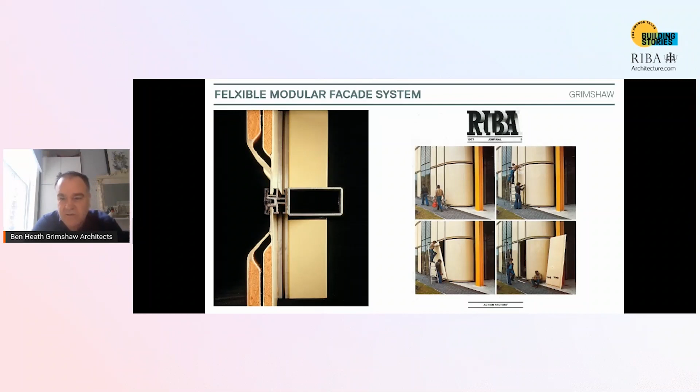And the image here is a photo from the cover of the RIBA Journal in 1977, illustrating that even wearing extreme flared jean trousers, you could change out these panels in under 10 minutes. And here's Nick inspecting these GRC or GRP panels on site.

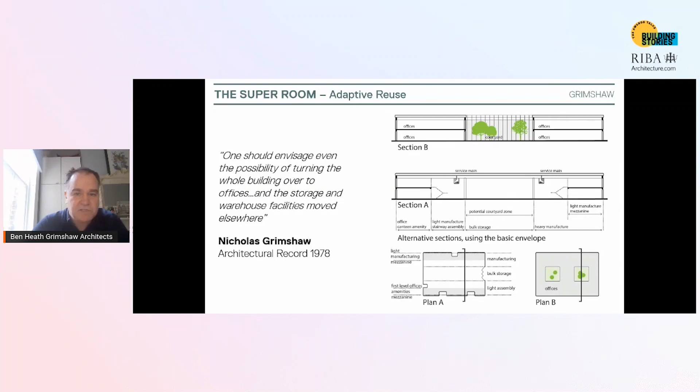And another key feature, longer term, the building was imagined as what Nick called a super room. And this is an illustration from the Architectural Record article from 1978, showing remarkable foresight from Nick, where he talked about, in the future, it may be a factory now, but in the future, it might even adapt into an entirely new use from which it was originally conceived. And these sketches are the sketches that he produced for the article, showing that, maybe introduce some courtyards and it could be an office building.

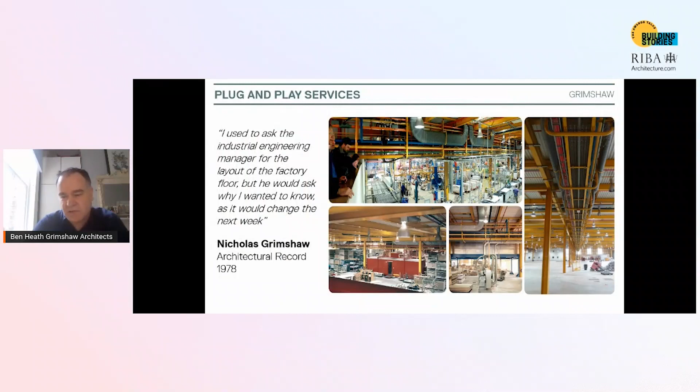So some of the other key features of the original building, this democratic factory, this idea of a focus on access to external environments, views, daylight, the idea that just because it's a factory, it doesn't mean that it shouldn't consider the well-being and health of people and create quality environments. Similarly, plug and play coded services supported the ever-changing manufacturing. So this adaptability and flexibility is at the heart of everything about it.

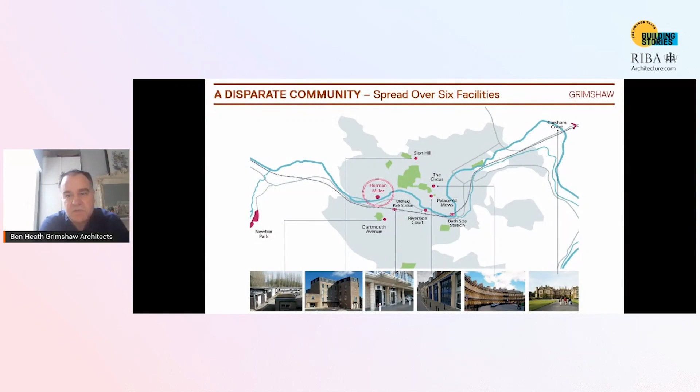And then over 40 years later, and actually following the listing of the Herman Miller factory, we were appointed by Bath Spa University to look at adapting the factory to accommodate their schools of art and design. And like many academic institutions, they'd grown organically over time, and the school was spread out over 6 different facilities throughout Bath. So this represented a brilliant opportunity to bring them all under one roof and engender a spirit of interdisciplinary collaboration and innovation, bring all these people together.

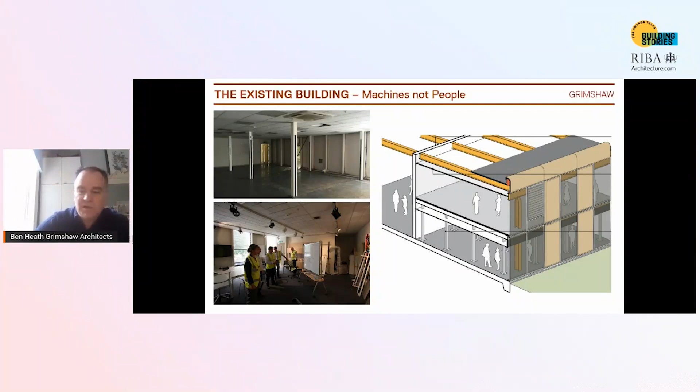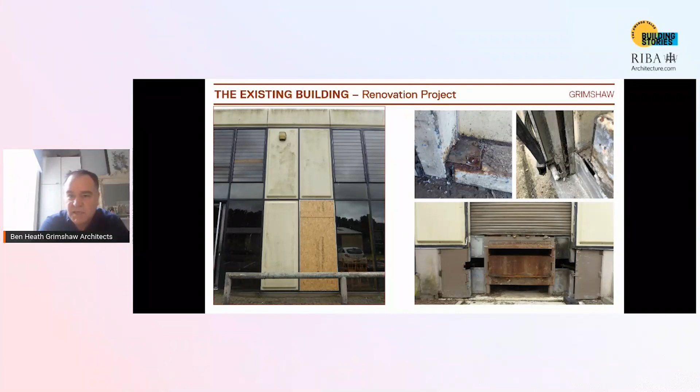Also, following a period of inoccupation and actually a bit of neglect, the building did represent a significant heritage and renovation project. However, as illustrated, this is a photo from shortly after the university bought the building. They had this pop-up exhibition in the space, and it just demonstrates that actually the bones and the DNA of the building really remained intact.

So what I'm going to talk through now are just a series of the key design moves we made, because I think when you're working with an existing building, but also a building which has just great integrity, it's about identifying the right key moves and building on the principles and values of the existing building, existing structure. So I'll just go through some of the key moves that we made, which were very much in support of the original building ethos and principles. So the first one is called repairing the super room.

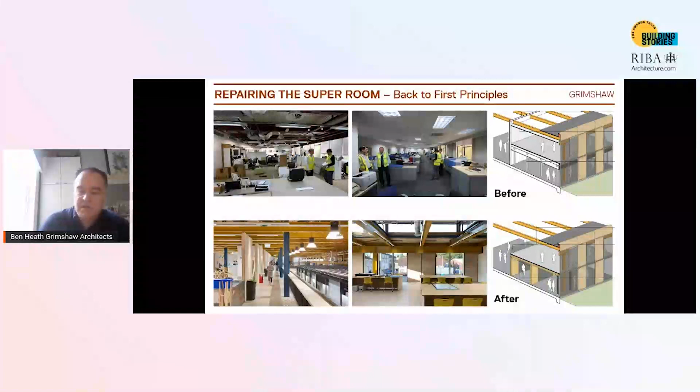So as I said before, the people had been siloed away in these little boxes, as shown in the illustrations below. The first move was to introduce open mezzanine decks, opening the space back up into the heart of the building and putting people at the heart of the building again. So, visually connecting the spaces and the people back together, connecting those people and spaces back to nature outside, and just flooding those spaces with light and creating visually uplifting environments for people to learn and work in.

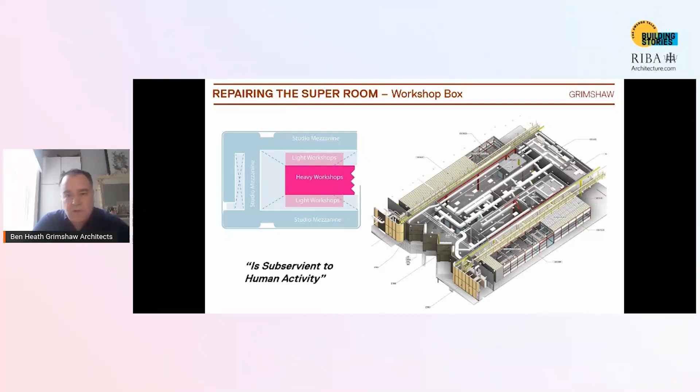The other key aspect of repairing the super room, because often the secret to flexible spaces is actually identifying and accepting what is inflexible. And so in support of an open, connected, completely adaptable super room, what we did was the heavy workshops, so things like metalwork, casting, woodwork, were located centrally in what we called the heavy workshop box, and then lining either side of these and animating the surrounding spaces are the light workshops, so things more like printing, photography,

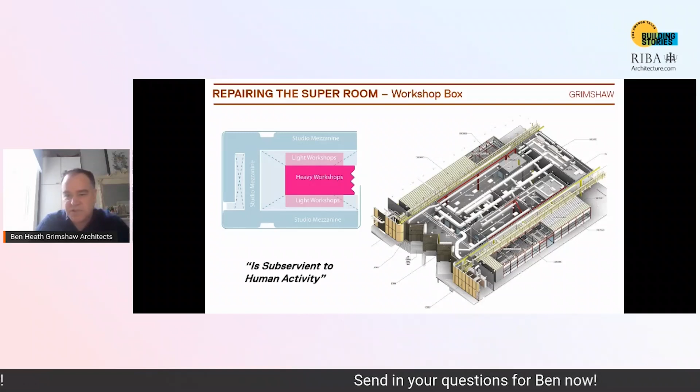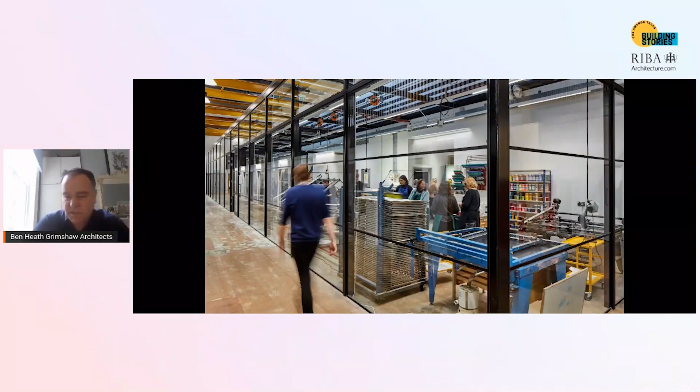paint, digital. And this was very much at the heart of the university's ethos, the School of Art and Design's ethos, which is putting making on show, so learning by seeing and doing by making, which is something that the Dean constantly repeated to us. And again, even these workshop spaces are flexible workshops, so they're able to adapt to the specific workshop requirements, but also as course architecture changes, they can adapt and change. So even though it's the same spatial configuration, they can offer a number of different environments.

And then spatial planning. Again, we just made some really simple key moves. The first one is a new internal street. So on the left there, a new internal street connects the city side to the north to the River Avon to the south. So, really lovely two front doors, a riverfront door and an urban front door. And then on the right, a simple wrap of first floor studio space above, and then publicly accessed via the retained existing visitor entrance to the west. That's on the left of the street, and that promotes public access and collaboration.

And then the building to the right, to the east, is serviced from the existing loading bay. So the area to the east of the street is more private, accommodating workshops and private studios, and to the west is more open and collaborative. So the street, as well as making its connections, defines the nature and interstitial space of the building. So that's a view of that internal street. We're looking towards the river entrance, connecting people and connecting place, and promoting learning and collaboration through visual connections throughout the building.

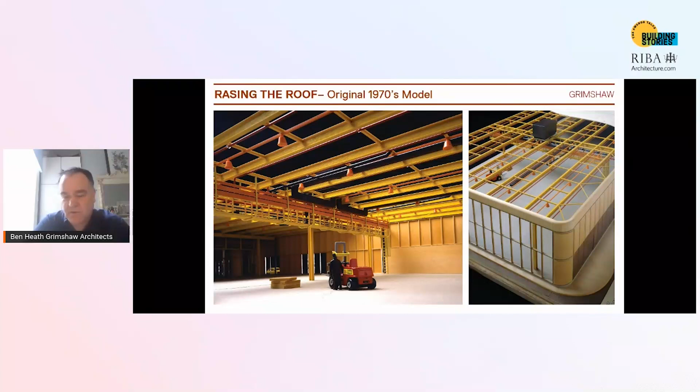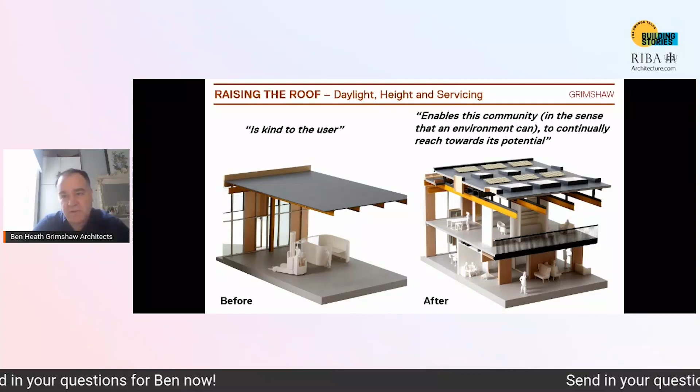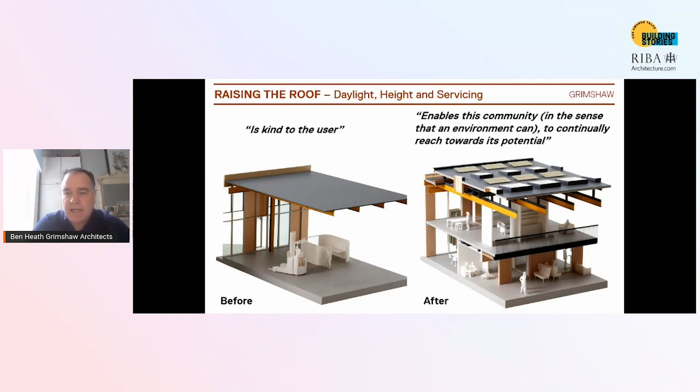So we introduced a new mass timber or CLT roof, which is lifted on these 1.5 meter high structural Vierendeels, and this allowed for additional structural capacity for high performing rooftop PVs, but also a service zone located above those heritage beams, and critically an additional 1.5 meters of space at mezzanine level to support studio space, and then a continuous clerestory and north roof lights, ensuring natural daylight throughout the building. So yeah, flooded with light, efficient, flexible, and spatially generous.

We had some height considerations, so we couldn't actually have sawtooth north lights. So we used an interlayer, which blocks out everything but north light. So again, throughout the building, which was important in the School of Art, or one that accommodates art, north light evenly distributed throughout. Another one was plug and play, flexible systems.

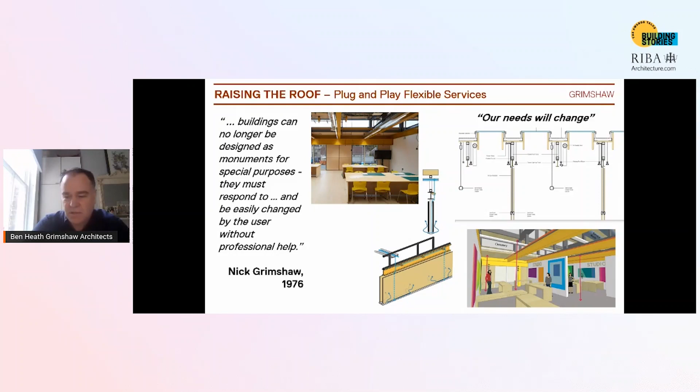So following the same principles as the original factory building, a plug and play high-level service route runs throughout the building, allowing for data and power to be introduced throughout the mezzanine studios in line with any changes of use or accommodation. And what we did is we used this really useful 1.2 meter grid of the heritage structure as a framework for a flexible fit out within the mezzanine space, with the studio space being completely tunable to specific needs and future requirements.

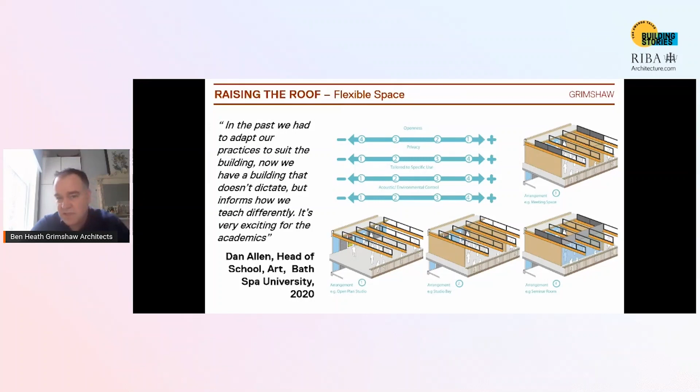So anything from the left where it's completely open plan to the extreme where it's actually a fully enclosed unit. And actually what happens for the art studios, the students build their studio space in line with these grids at the start of the year. So yeah, lightweight, low carbon, high performing new roof, but retaining that heritage building aesthetic, clearly articulated throughout.

So upgrading the facade. On the left is the original facade as we found it, which was a single glazed, non-toughened piece of glass and a very lightly insulated GRP panel. But what was critical, obviously, to the building is its flexibility. So the existing facade was upgraded, replacing the non-toughened single glazed panels with bespoke double glazed units and renovating the GRP panels. But critically the same flexible and adaptable modular system was retained.

But through the increased insulation, double glazed units, etc., the total environmental performance of all aspects was improved by over 400%. And despite their age and a number of holes being drilled through them, 100% of the GRP panels were reused.

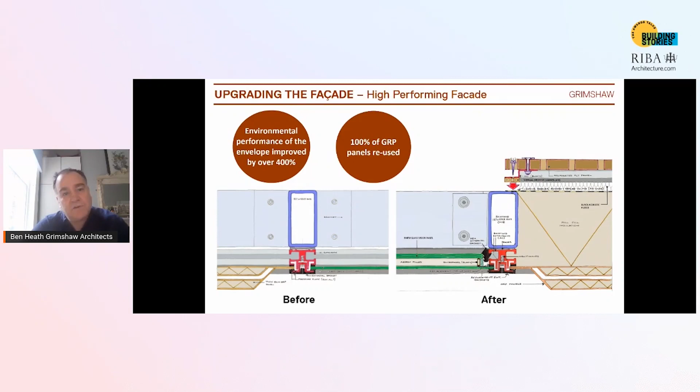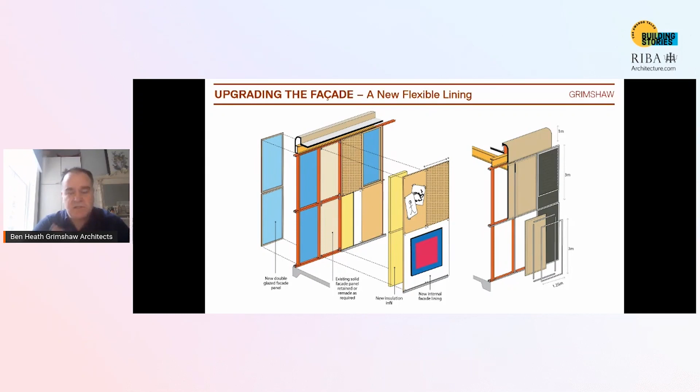So in addition, a new flexible modular panel system was introduced internally. We introduced the same idea of a flexible panel system internally that existed externally, through the process of insulating. So whether it's an office space or studio space, you can swap out the internal panel in the same way you can the facade. So there's the external modular system on the left, upgraded and refurbished, and the internal modular system on the right there. So a high performing facade system delivering the same aesthetic and adaptability as the original Herman Miller factory building.

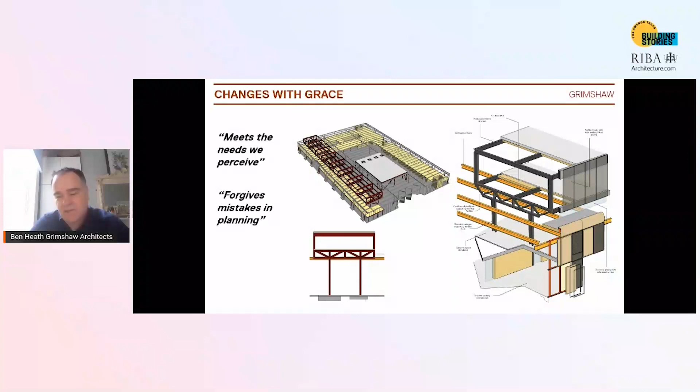So changes with grace. The original Herman Miller building had been specifically designed to adapt and change to future needs, but where the existing building was unable to meet those new user requirements, we introduced a more private, standalone rooftop pavilion. This was critical to the university's brief and success because it created a more private, flexible, different kind of space with these amazing views over Bath. But it was, again, slightly fortuitous in that it utilised existing foundations that had been put in place where some future new structure was actually imagined.

So doing more with less has become a bit of an imperative, both for universities and in responding to the climate crisis that we see ourselves in. So the embodied carbon within this building shouldn't be lost if at all possible. And on this project, we saved 1,420 tons of carbon. What's that? That's over 200 elephants. But I think what's really important about this project is that it illustrates this does not need to be at the cost of future flexibility or compromising environmental performance. So you can have your cake and eat it too.

Finally, I'm just going to touch on working with Bath Spa University, but also working with universities in general, because despite fairly modest budgets, I find that university projects tend to be incredibly rewarding and really rich projects. And I'll just explore from my experience on this one why I think that is.

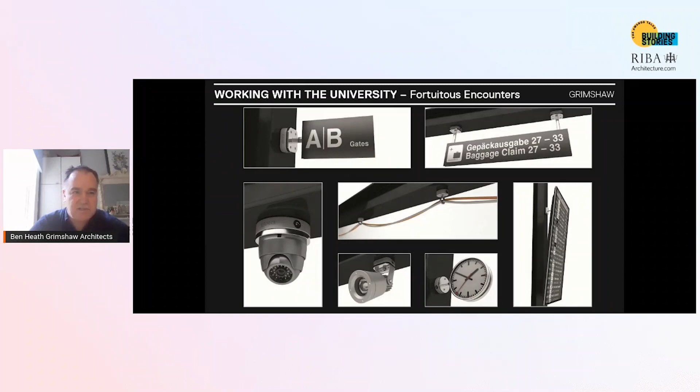And within that, you can adapt anything to do it, whether it's lighting, signage, clocks, whatever. Another key aspect of working with universities is, as well as being kind of experts, which is quite a delight, which means they also tend to respect you and the other consultants as being experts, which not all clients do. They're incredibly passionate people. So we obviously go through an in-depth briefing process with all aspects of the university: academia, but also technicians.

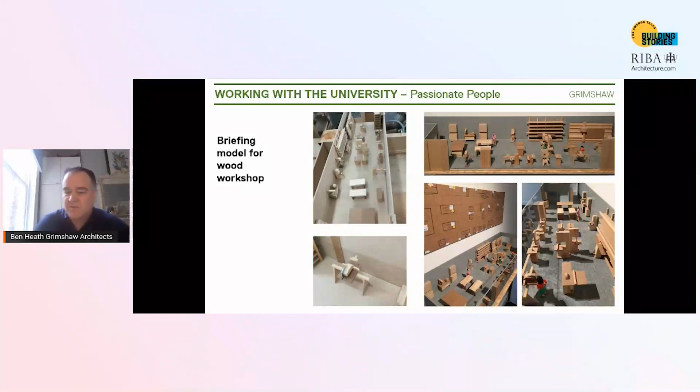And so we had our initial briefing workshop with the technician that runs the wood workshop, and we came back for the next one, and he'd obviously built this completely to-scale replica of the kind of discussion we'd had at the previous meeting, obviously all in wood, but it's that kind of level of passion that really helps bring great results. And then one aspect is also empowering students.

For the project, we worked with the undergraduates at the university, who actually developed this really lovely bespoke font and building signage system, which we ended up using throughout the building. There are other examples as well. We did some fabric acoustics with an artist who was an alumni of the university, and other graphic work as well. So again, it's really enriching both for the university, the students, but particularly for the designers, I think, to work with.

And then the final thing I'm just going to touch on is they're unique organisations in many ways, remarkable and frustrating in equal measures. We wanted to try and organise a time-lapse camera for the project, and we were told that, yeah, that sounds like a great idea, but we can't really afford it. But we pointed out, actually, they're 200 quid, surely we could afford it on this project. But no, the budget was stretched. They could only do what they could do.

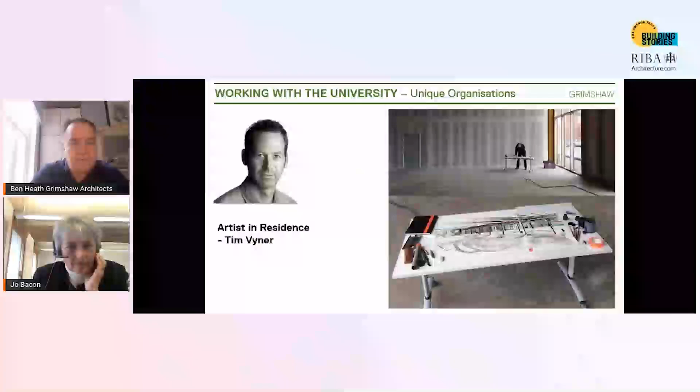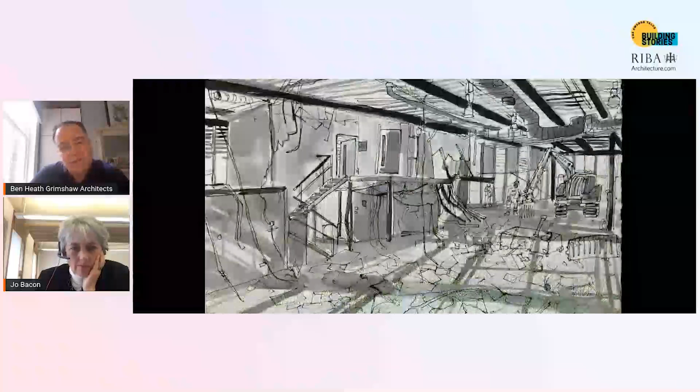But what they could do was provide an artist in residence. So Tim Vyner, who was an alumni of theirs, internationally recognised illustrator. So while we didn't have a time-lapse camera, what we did have was an artist in residence who recorded the whole process we went through, whether that's the site hoardings that he sketched, but also just recording and sketching and illustrating the whole design process. So there you go. And that's it from me.

Thank you. Ben, that's great. I've got a couple of quick questions. Can you talk a little bit more about the cladding? I mean, it was 1970s yacht technology. So the real question is, was this the most difficult aspect of the upgrade to current standards? We thought it would be, but actually it turned out not to be. Yeah, so it's exactly as you say.

GRP is more common in architecture now, but at the time Nick had to go to some Cornwall boat builders to actually get this stuff made, to the point where we couldn't quite understand why it was made like it was made, but we copied it just in case for some of the new panels we had to make. And there was a lot of worry around what they call fibreglass cancer or GRP cancer, but again, no delamination, amazing condition, and it turned out to be such a flexible material in that you can just patch it and repair it.

And actually what was really nice is we did all the repairs within the building itself, so it was like an organism healing itself. We learned a lot. The contractor was very nervous about it, in terms of committing to how many panels they'd need to replace, but actually in the end we salvaged them all. So we thought it'd be a lot more challenging than it was, and actually I think it just shows how flexible and diverse the material is.

And I've got one other quick question. One is vaguely how much of the original structure was kept in its entirety, but also, was there any hesitation from the Bath University team to invest in retrofit rather than a new project? If I'm honest, my worry is actually if it hadn't been listed, they might not have gone down this route.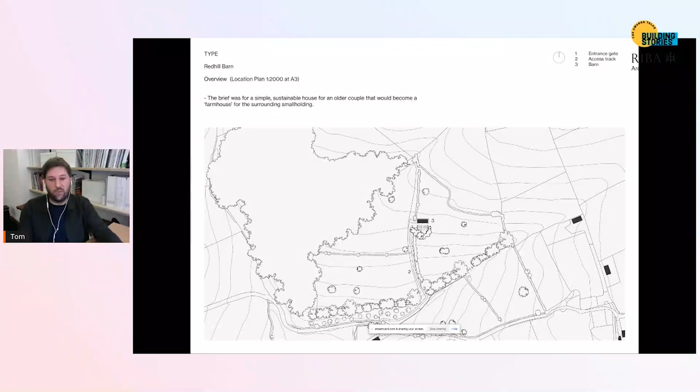And after years of searching, we found this site which has 23 acres of land, and it had a barn sat right in the middle of it, totally roofless, no planning permission, no access, no services. It was quite a crazy thing to undertake, but the decision was that this was going to be the site for this project. And there you see the barn on the right, sat in this parcel of land. In terms of their brief, we'd originally talked about finding a site and building them a much smaller house, but having found this building, it is the size it is.

So they had a very simple and modest brief for basically a 2-bedroom house with flexibility to have people to stay. That gave us the flexibility to work within this shell and to look more at the conservation of the overall building. But I think a big part of the brief for them was not to change or ruin the character of this thing, because having found this relic of an agricultural landscape, we all realised that the building was a very important and key part of the project.

Also, because it's a big building and it was more than we ever planned to take on, we had a very tight budget, and the location meant that a lot of our budget was going to go into services and access. So that set the whole project to be about being sparing and very thoughtful in what we could do. So this is the building as we found it, and it really was a stone shell, but the principal thing was that the walls and the elevations were intact. Originally this would have been a 2-floored building with a large threshing barn for grain on the upper floor, and then a cow byre on the ground floor for cattle.

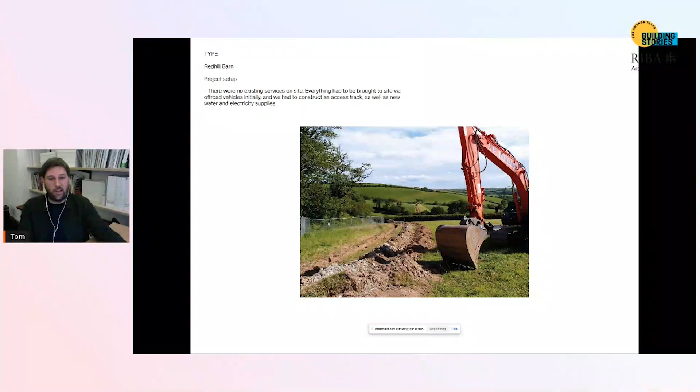One of the first things we had to do was put in the services, so you can just see how far we had to get electric and water. The trench went right down the valley and into the next fields. And this was our site hut that we built.

So the whole team came down with partners, and we stayed in a cottage for a weekend on a very blustery, wet and windy weekend in, I think, March, and built this site hut, which stayed up for the full duration of the project and was basically our base to cook, work, draw, detail. But having this office on site meant that the way we did the project was working with subcontractors, working with timber framers, masons, and every detail was talked through with the people that were going to do it. And we had a very interactive process of drawing and discussion.

But beyond that, Sarah, myself, and my father also were very hands-on, and every day we would also do work on site. So as well as designing and coordinating, we were also doing some of the physical work ourselves, usually slotting in where there wasn't an overlap with the different contractors.

So then this brings us on to the design and our approach to how we actually undertook the building. And the key thing about that was that we wanted to be absolutely clear about what was original and what was added. And that clarity of old and new was the dominant guiding principle from a landscape scale right down to the smallest details.

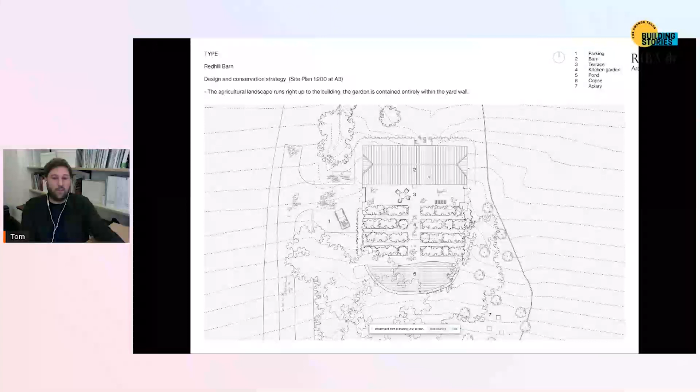The other key landscape move was about the curtilage and how we dealt with the garden and the domestic spaces. And we were absolutely adamant that the building shouldn't spread out into the landscape, and that the agricultural and wild landscape should run right up to the building as it always would have been. So the garden's contained to this semicircular fold yard that sits in front of the building, which once would have housed the livestock. And then at the rear of the building, the field really runs right up. There's no garden or paths or any domestication. It really feels like it is in the middle of the open countryside.

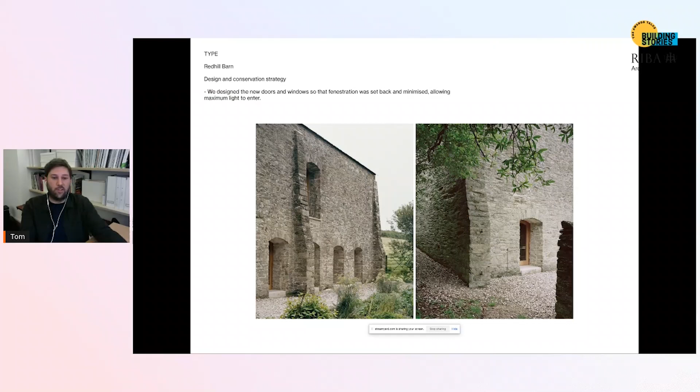And this drove the design of the glazing and fenestration. So we set everything right back and tucked the frames in behind the walls so that the amount of glass would be maximized and bring as much daylight from these openings we did have as possible.

And these doors on the ground floor were built for cattle to go in and out. So they're very wide. It's a windy site. And a conventional side hung door would be forever slamming in the wind and really cumbersome. So we came up with this idea of a pivot door, which would balance and feather in the wind and deal with this oversized opening without the additional fenestration of making a set of double doors or anything more complicated.

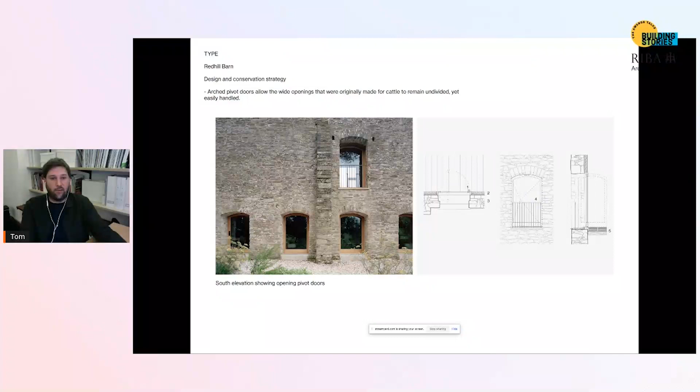So again, everything's designed to maximize the amount of light we can bring in. And that's how that door works on the inside, and there's a really nice balance to them. They translate this opening that was made for cattle into something that's very usable. And there you see the amount of glass we achieve by setting the frames back and tucking everything in. And actually, it's a very glazed building from the openings we have.

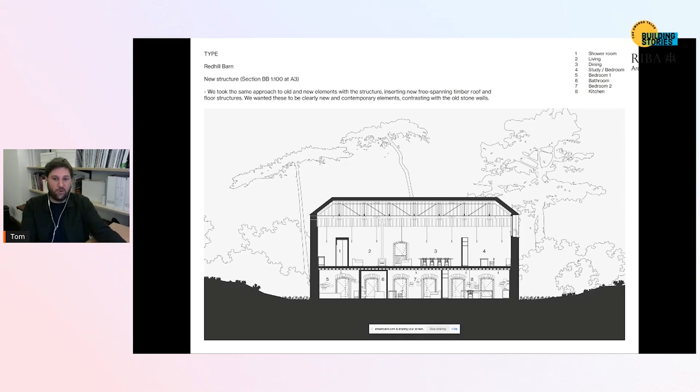So you've got a new timber roof truss structure and a new intermediate floor, which creates the principal spaces of the building. One thing we noticed when we started to draw through the building was that on the first floor, the height was enough to give us two floors if you ever wanted to.

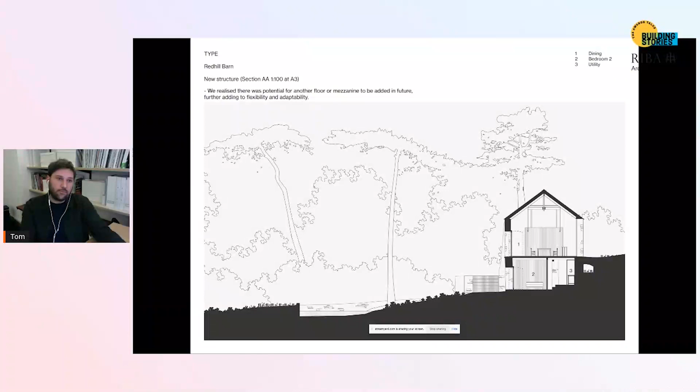And we were very aware that we're building a house for an elderly couple, and it's a big house. So we wanted to create something that was adaptable and hopefully would find future uses, perhaps as a family house. So we didn't want to constrain the space, and we realized that any traditional A-frame truss would bring a tie down quite low into that space, which would hinder that adaptability.

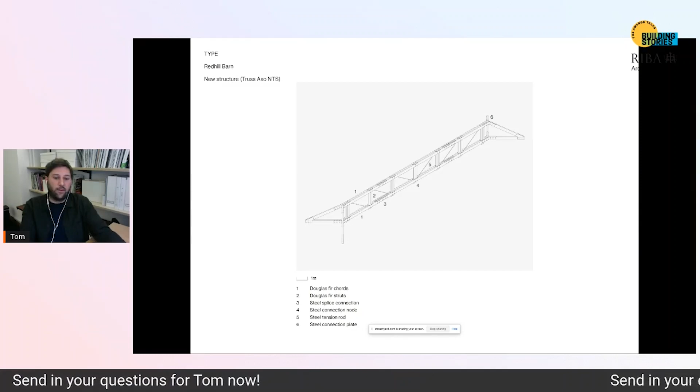And the solution we came up with the structural engineers was basically to span the space the wrong way, from gable to gable, with this truss structure. And that effectively is so efficient that it brings everything much higher up into the roof and allows for those two floors, but also gives a really impressive vaulted structure.

The truss was quite an ambitious thing to make. It's very simple, but it's this technology that's outside of typical framers' language. So they pre-assembled the entire thing in these sheds before dismantling it again and bringing it to be assembled on site.

And the result is what's hopefully a very contemporary structure, but hopefully echoes that pragmatic minimalist sensibility that old barns have, and why we love the structures, because they're doing the most and spanning large spaces in an elegant way with as little material as possible. So the language of doubled up members to use smaller diameter timber and using steel in tension where it's more efficient was guiding this to create this structure.

The other side of the structure was the first floor, which is a much simpler thing, just post and beam, but it sits on these stone columns, which we felt was an essential part of the building to conserve. So the columns needed to stay load bearing, but they didn't have any foundations. And the structural engineer was very keen that these things were built in with massive concrete feet to hold them in place.

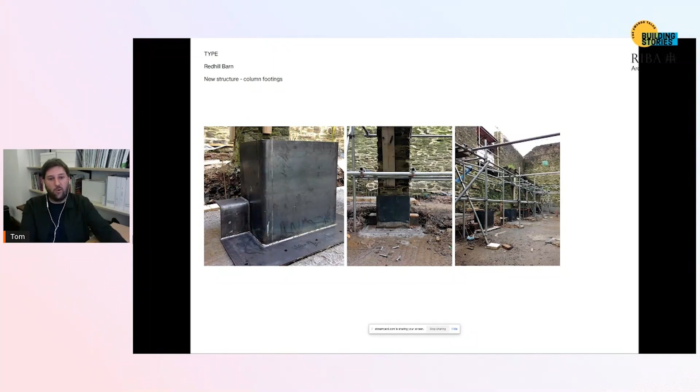So then to the layout and program. Again, it's about doing as little as possible with the budget, so creating as little division as possible just to give us our spaces. So we employed this device of boxes, which we inserted into the plan. So a box for a bathroom at the east end, and a box separating off the kitchen, which creates this kitchen larder storage, divides the ground floor into 3 spaces.

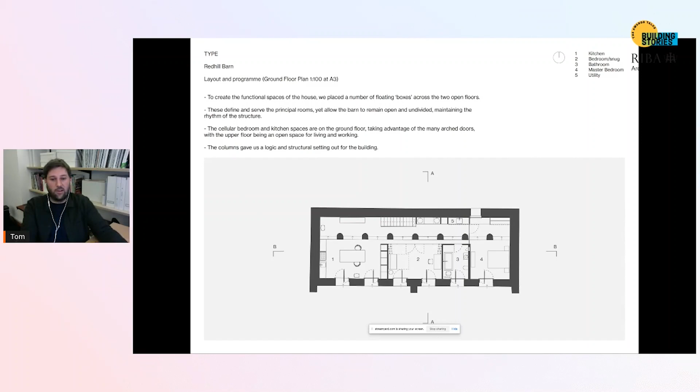The kitchen, the clients were adamant would stay on the ground floor because they wanted to have south-facing access to the kitchen garden, and then this flexible bedroom space in the center of the plan, and the principal bedroom at the east end.

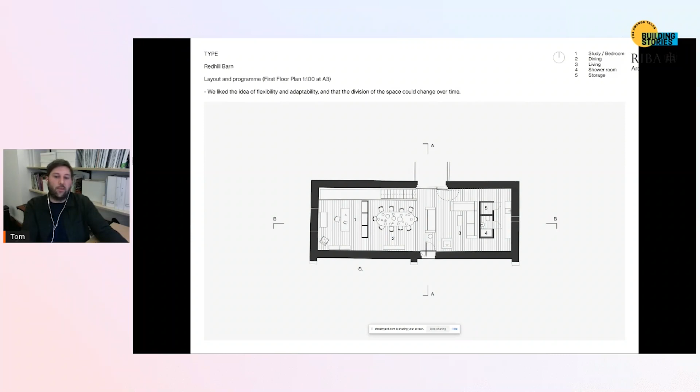And then on first floor, again, just using this device of 2 simple boxes placed in the plan, which bookends the central living space, a special event dining space, and then at the end on the west side, a study homeworking area, which becomes another sleeping space when we're there as family.

So this clarity of diagram of what's the old walls, what's the new structure, and then these boxes which divide space are carefully articulated in different materials, and it's a diagram that we stick to very religiously. So the walls are this white monolithic lime plaster, which helps the structure to breathe.

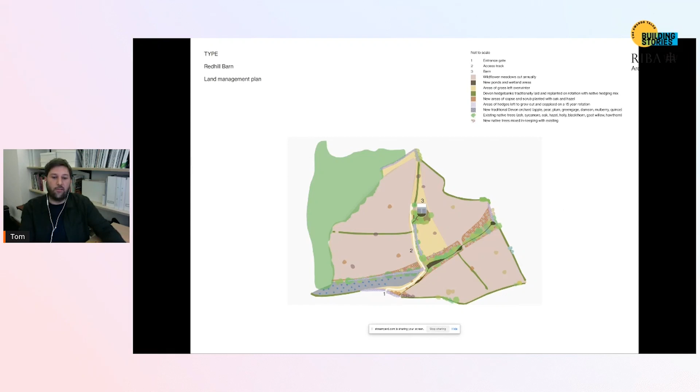Another big part of the project was the wider site, you know, the ecology and how we treated the landscape. As much of this project was about the building, it was also about what we could do with this parcel of land. So we worked up this plan for how the landscape would develop as a designed thing to create an ecological land management plan. And then you see how some of this is coming into effect.

So this wildlife corridor of very wild and scrubby land that accompanies the track up as you enter the barn. And some of the projects underway, including wildlife ponds, replanting and laying the traditional hedges, and the planting of a traditional orchard to create different habitats.